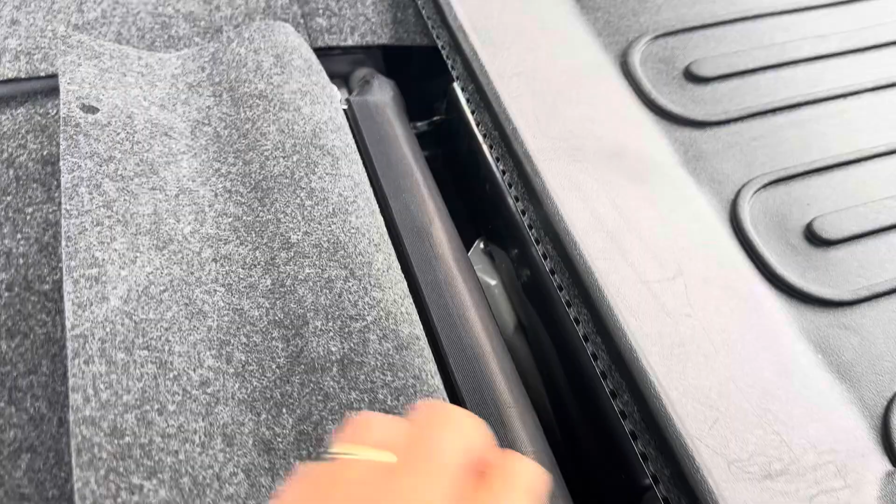I'll show you. Originally, I had planned on kind of mimicking the mounting points of the 04 to 07 STI, and I was going to try to get the bracket to kind of snake down through this little area here. However, the seat cushions kind of interfered with that, and I didn't want to muck around or modify the stock setup here, so I had to come up with something else.

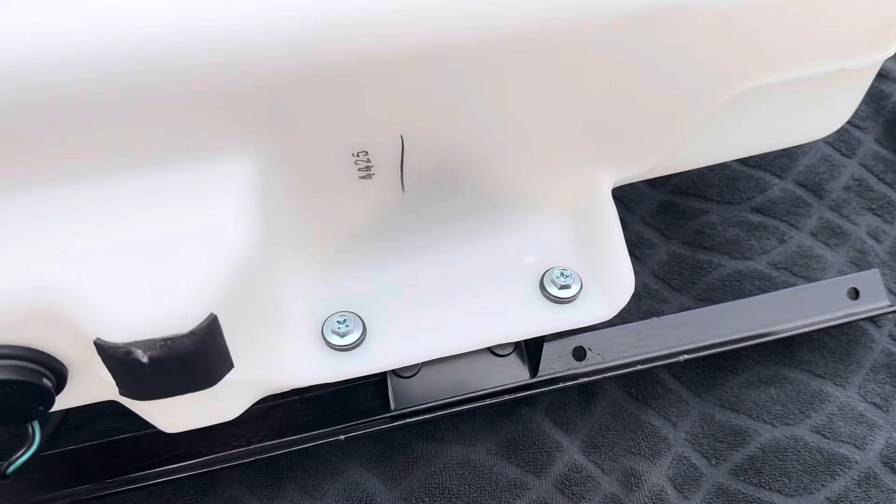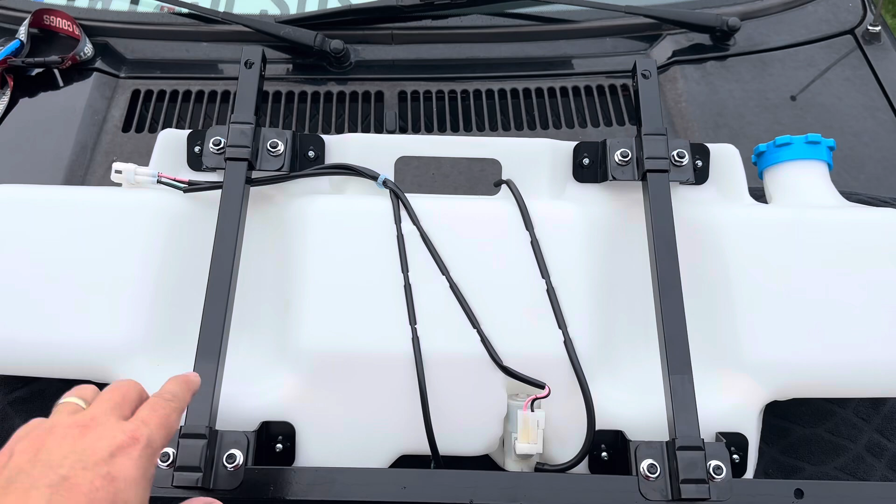So as you can see, this is the 12-liter intercooler spray reservoir. Now, I had to modify the bracket that came with this particular setup. Let me go ahead and flip this thing around and show you what I did. If you haven't seen the parts for this, you probably don't know what you're even looking at. But what came with this were these two, I don't know what you call them, mounts, square brackets or whatever. Anyways, this was on the bottom of this.

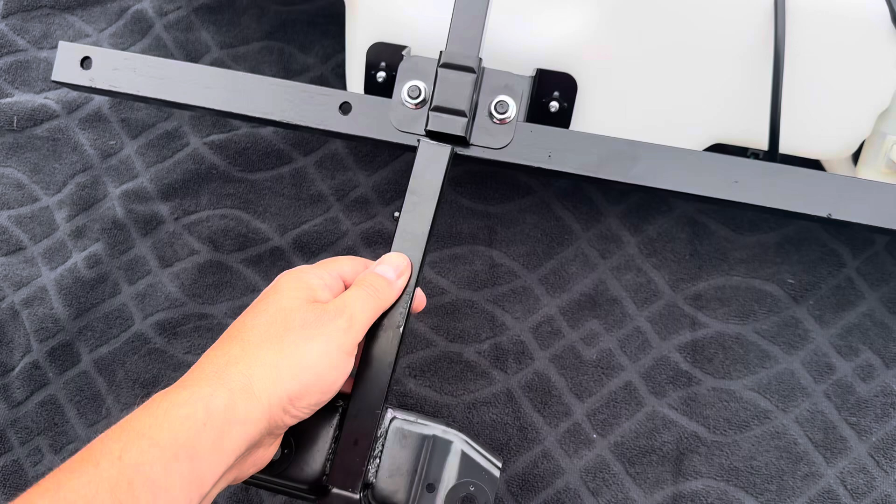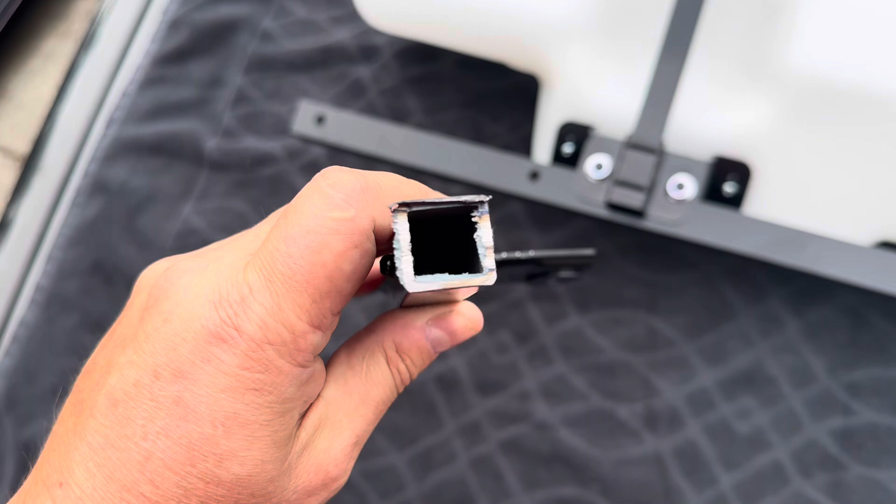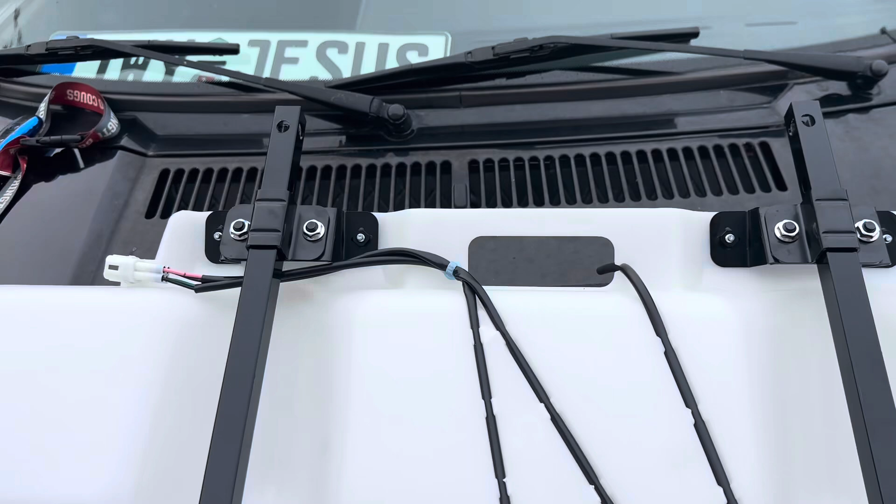I ended up having to cut this off because this is the part that goes down behind the seat, which did not work in my case. I thought about maybe bending it, but this steel is a bit too thick to be able to do that. So what I came up with is I just went down to my local Home Depot and got some of this angle iron here. The idea here is to pretty much just have two mounting points, which are going to be at the 12 o'clock position, as you can see here. So literally, here's going to be the back of the rear seat, and it's going to sit up like so.

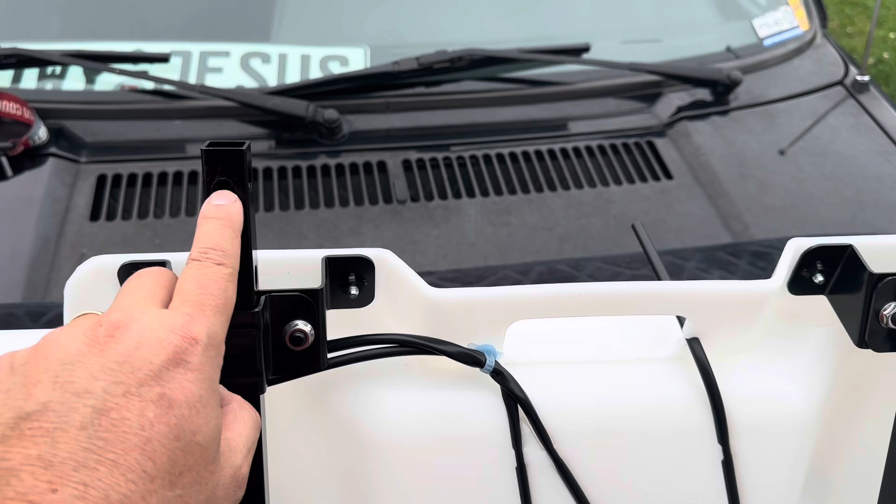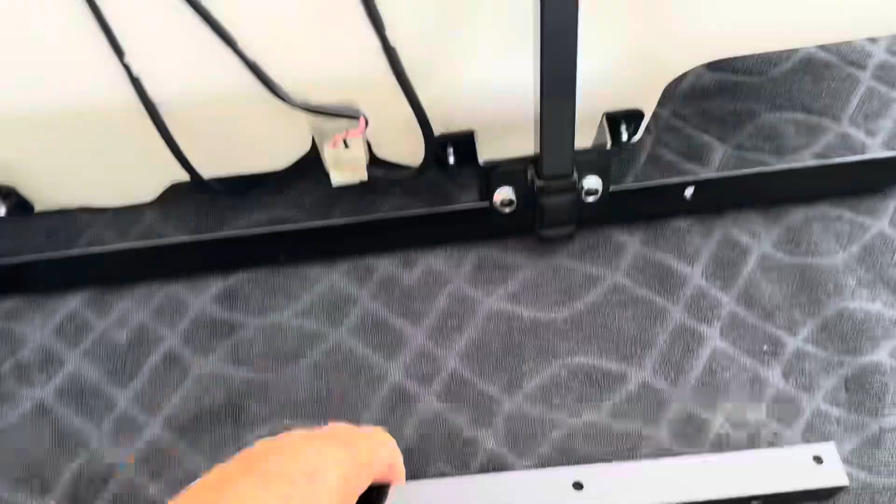Now, the only mounting points are going to be these two holes right here, which I have this little angle bracket that I'm going to use. What I'm going to do is self-tap this bracket into the rear shelf there where the subwoofer is. Let me show you. So it'll be mounted like so, and I plan on just running two bolts through there. Now, the way I have it set up, it's going to be like a gravity type mount. All the weight is going to be on this foot here, as you can see. I wanted to make it long enough so it was even with the reservoir on both sides. So that's why I went with the length that I did.

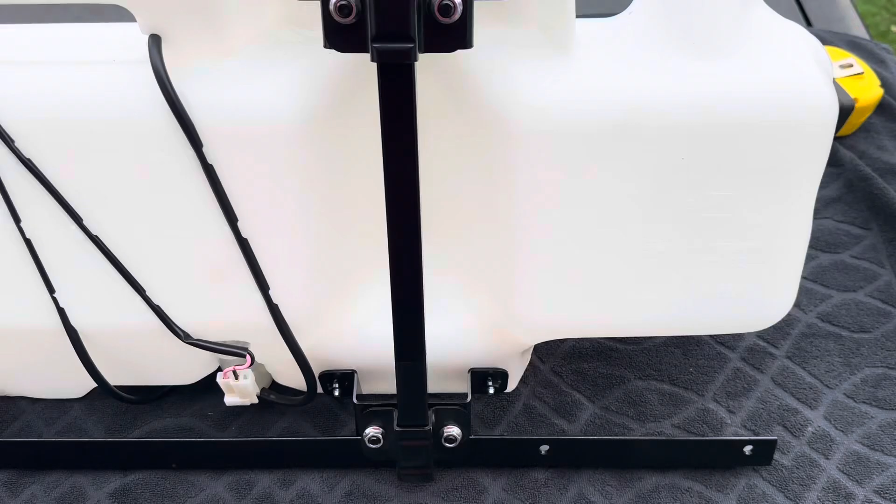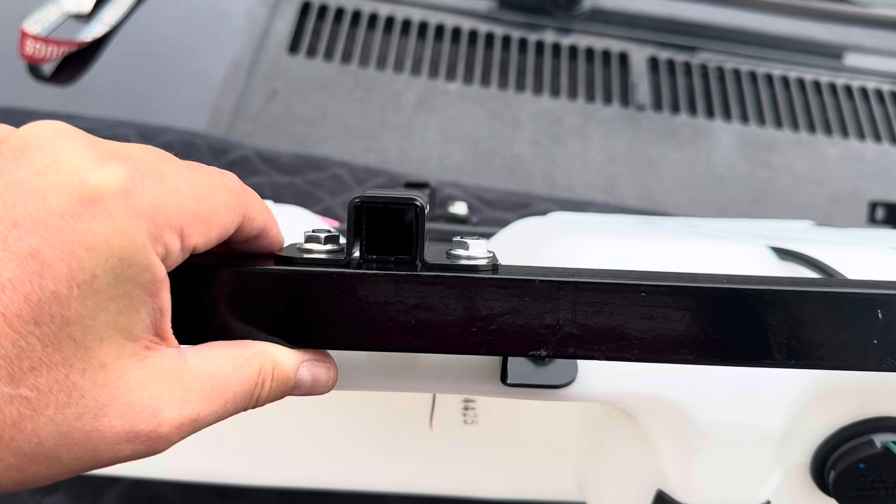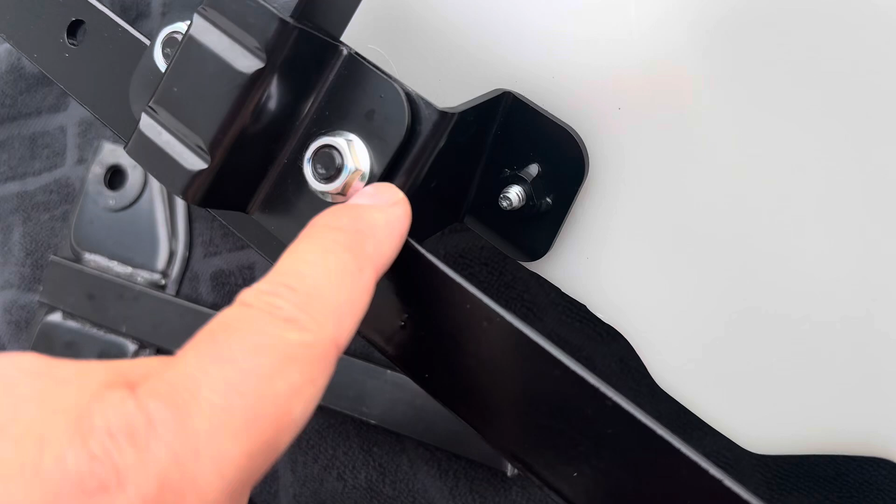Kind of jimmy rigged. I'm not sure if this is going to work. Everything's by trial and error. But this is what you have. So there's probably about 1/8 of an inch or 1/4 inch of this bracket that is resting right there on this mount. And the reason why I did that was I didn't want to put spacers in here, so I don't know. That's just kind of what I came up with. Now, it is long enough. There's probably going to be about 1/8 of an inch gap at the top of this from the rear shelf. So like I said, this is going to be trial and error. I'll see if this works.

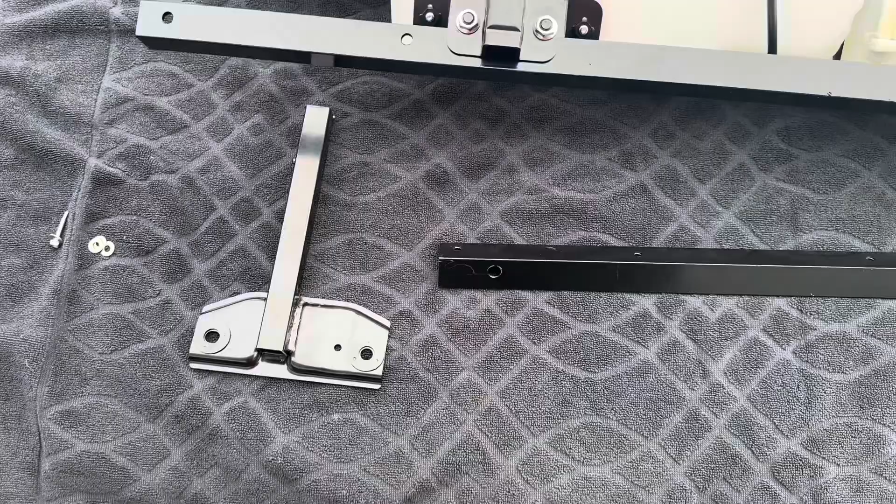And the part that I did take off, as I've shown you, is right here. I'm not going to give you any lengths because this is going to be kind of trial and error, so just do what works for you. I didn't want to modify my mat by cutting it up, so the idea here is it's going to be sitting on that angled part right there, and it's basically going to be kind of wedged in there, so I don't anticipate it moving around, if any, when it does get put in there. Besides, I'm probably gonna have my subwoofer kind of butted up against it inside the trunk there. So we'll see what happens next.

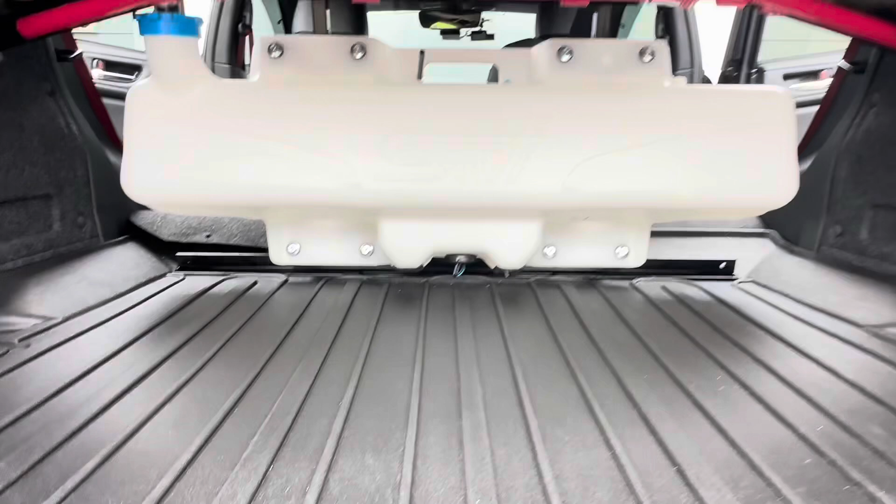All right, got the intercooler tank mounted. As you can see, it's mostly just gravity mounted. I'll show you. This is from the rear end, obviously.

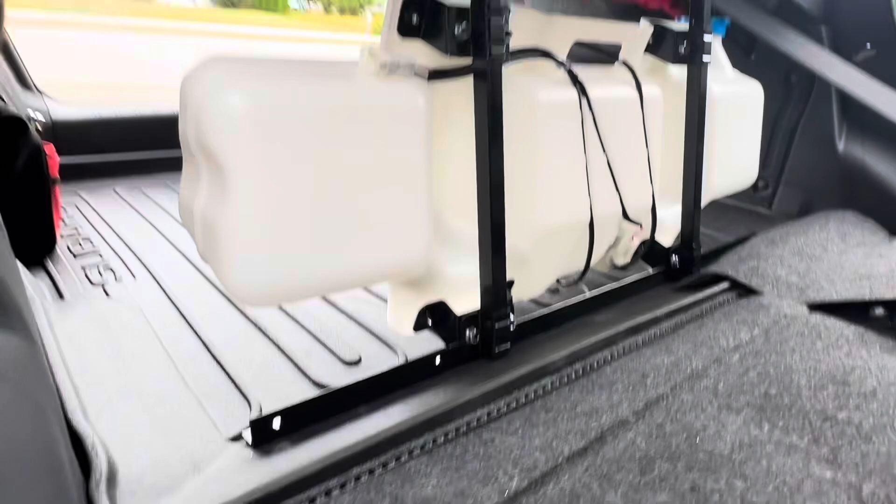So all the weight's going to be on these feet, and these bolts here are nothing more than just holding it to this bracket that I have self-tapped into the middle shelf here. But yeah, it's pretty sturdy. It's not going anywhere. All right, let's continue on.

Okay, so first order of business, we're going to attempt to install this hose. Like I said, this is from an 04 to an 07 STI. Here's the hose right before you. I'm not sure if we're actually going to need this 90-degree elbow here, but I will try to use this one that's already incorporated in the hose itself. And the location where I'm looking at putting that, well, let's just look at the picture here.

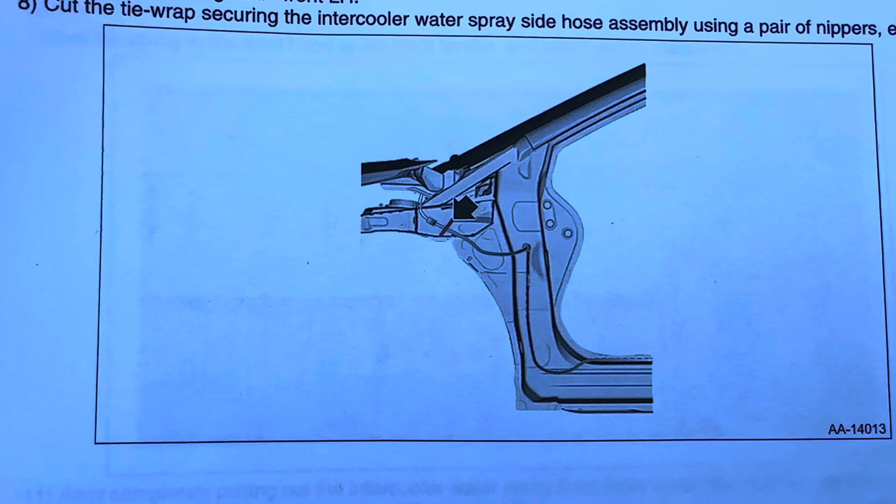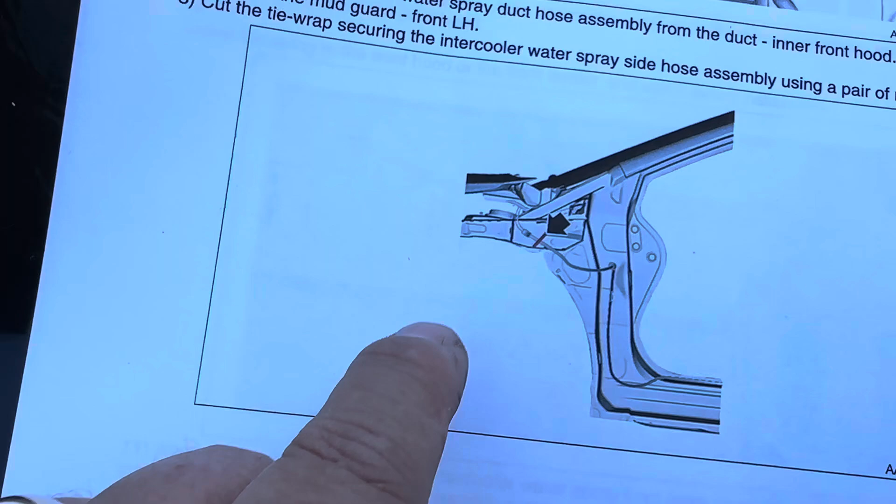So here's a diagram from the driver's side of the car. Obviously the door and the fender is removed, but as you can see there, the intercooler hose is right there. There's the hood. So it shows it coming out the bottom of the hood, I assume probably near where the hinge is. So if we look at the STI here, obviously the hood is up. There is a hole right there, which I'm hoping is where I can get this to feed through.

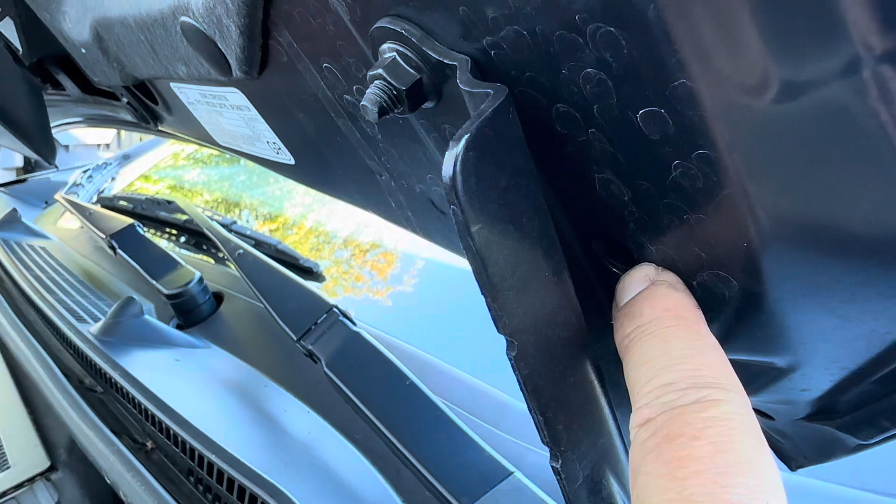So what I'm gonna go ahead and do is just take this hose sheeting and let's kind of snake it through to see if it pops up over in that location where we actually need it. And it sounds like it's moving through, and lo and behold, let's see. So feeding this through, I kind of shouldn't be using two hands for this operation, but be it as it may.

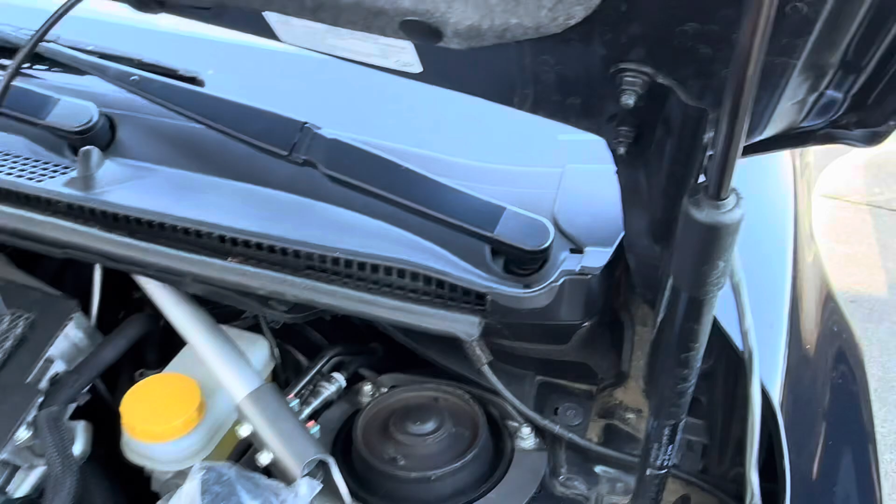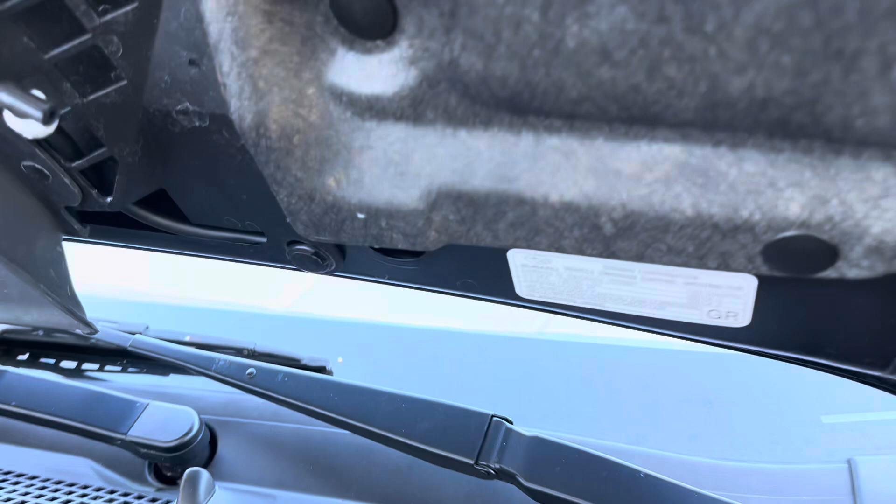So there we go. So what I'll simply do is take this end of the hose, tape it onto there, and simply feed it through. And I'm hoping this elbow right here will match up to where that hole is right there. All right, there you have it. So I can confirm that that part number will absolutely work with regards to the hood. So that 90-degree elbow, that joint is right there. So it's in an absolute perfect position as far as where this hose needs to be.

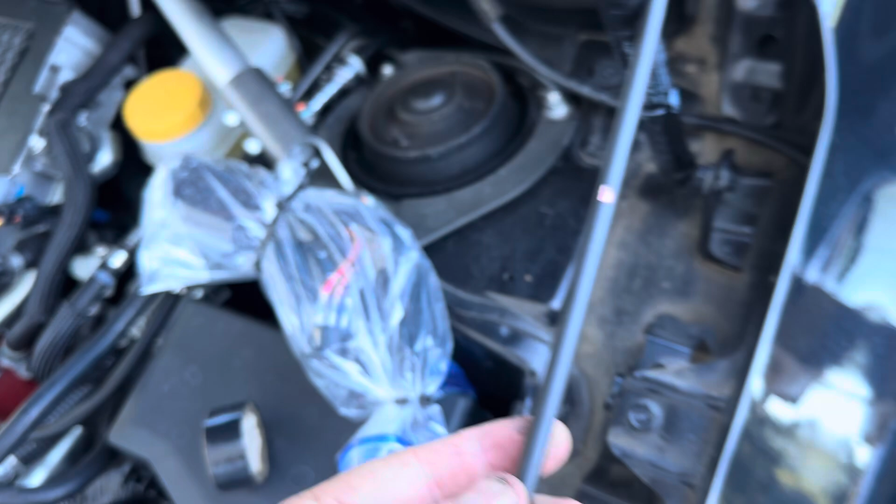And I just need to follow the instructions and bring it down through the little grommet that's on the inside of the fender, and I will go ahead and piece together the other intercooler hoses.

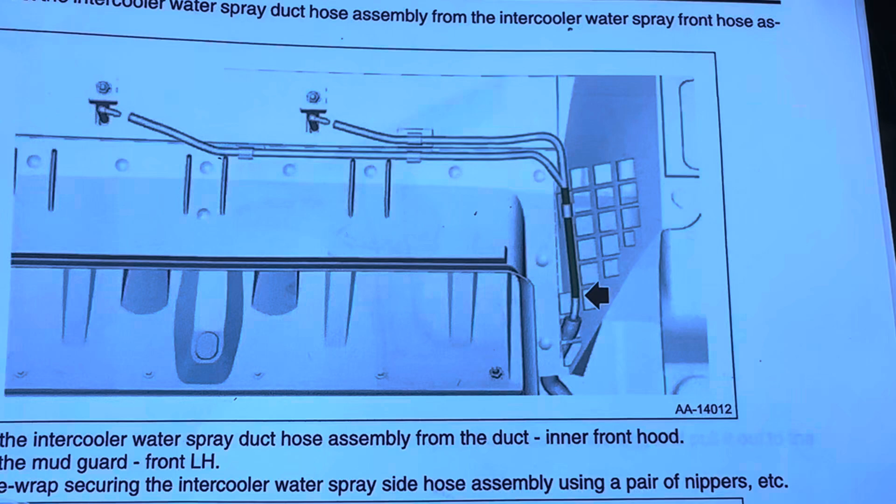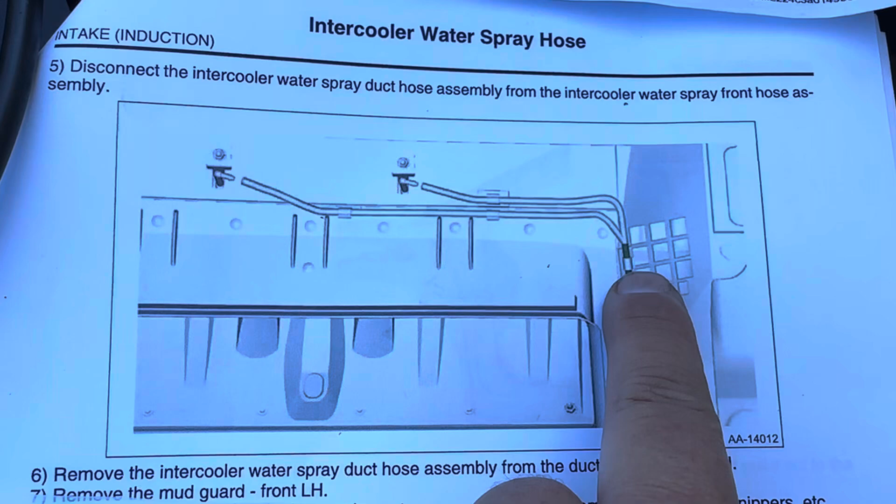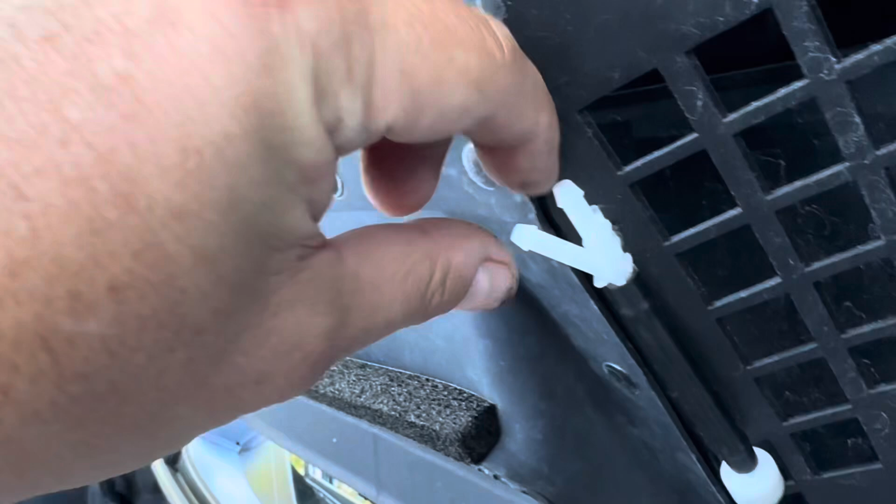Okay, next order of business is putting this part number, which is the splitter joint, if you will, which is represented right there. So just kind of lining it up with the way the S209 looks. I want to kind of get it in the exact same position. So I took a 1/4-inch drill, drilled a hole, and it simply just snaps into place.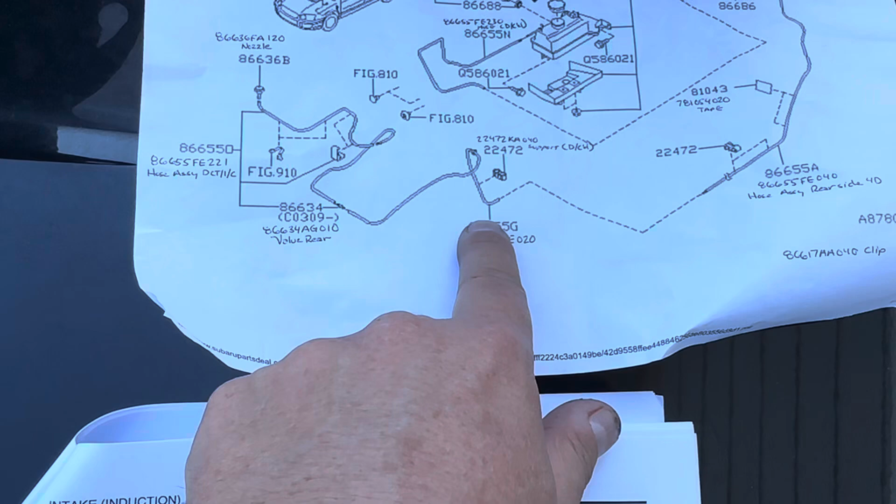And then I took 2.5 inches of this next part number, which is the next hose in line, which is right here. Again, going off the 2006 STI intercooler hose. So I figure if I have to, I could scab on an extra piece when it's in the trunk. I mean, I'm sure that this next piece will be long enough, so that's why I had no problems taking 2.5 inches off this particular hose here after the fender.

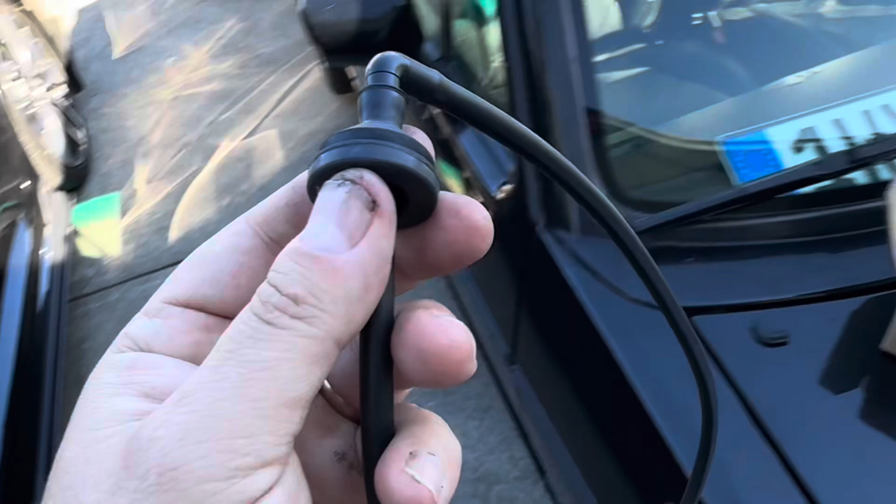So here's the hose here. So this is the fender grommet. So on the inside of the fender, this is how it's going to be. This shorter part going up to the hood, and then this longer part is where I took the 2.5 inches off of, hoping that won't be a big deal, but yeah. So there's our check valve, and I'll get the remaining hoses on next.

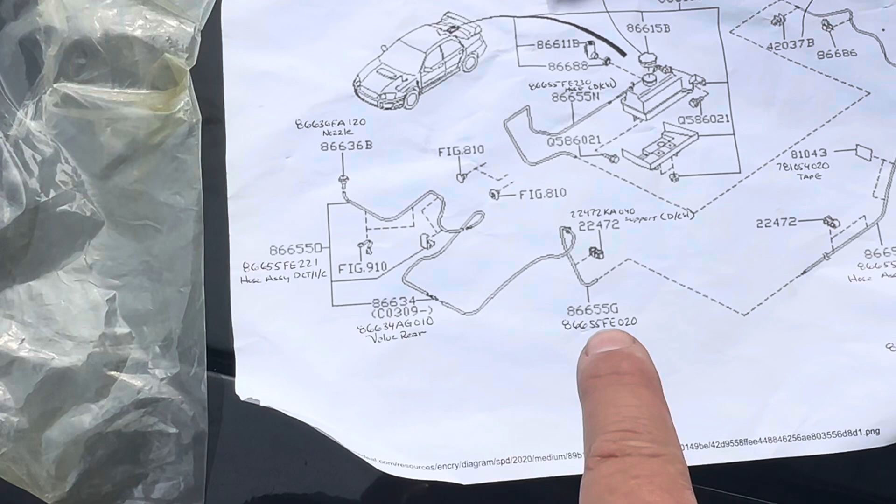Okay, so next I'm going to install this particular hose number, and looking at the diagram, it's this one. This one's already installed. This is what's in the hood, and this is what's going to go up to the nozzles. So this is the second one, and right here it shows there's a grommet, which I have right here, that passes through on either the firewall or the fender side of things. Well, since we really don't have a firewall grommet, we're going to feed it through the passenger side.

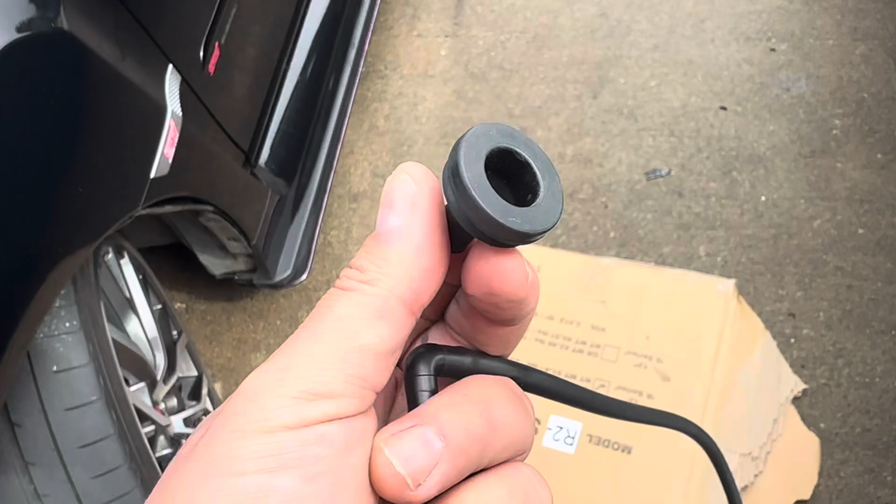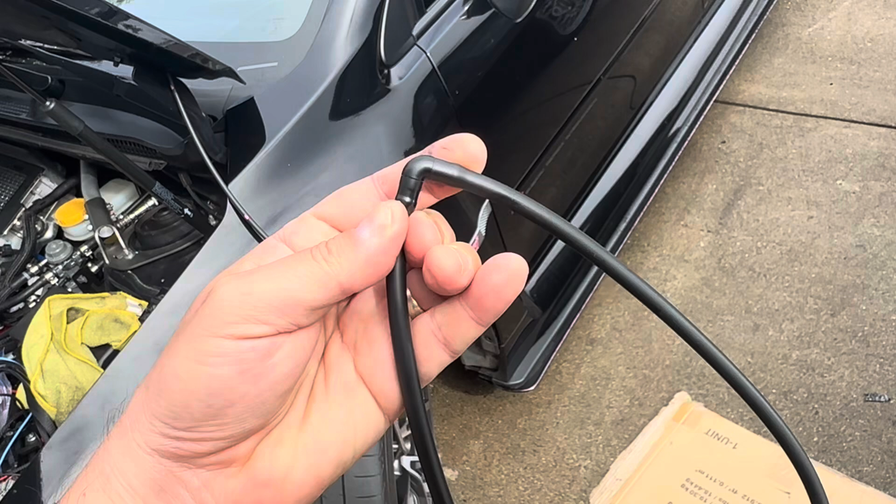So I got it all prepped up. We're going to connect it here. Don't really need this, as there's already a big boot grommet, if you will. So what I'm going to do is there's two lengths of this. There's the short side and long side. And what I'm going to do is strategically place this elbow here right into the grommet. And the reason being is I'm not sure how thick that grommet is, but I don't want it putting pressure where it's going to squeeze the hose off.

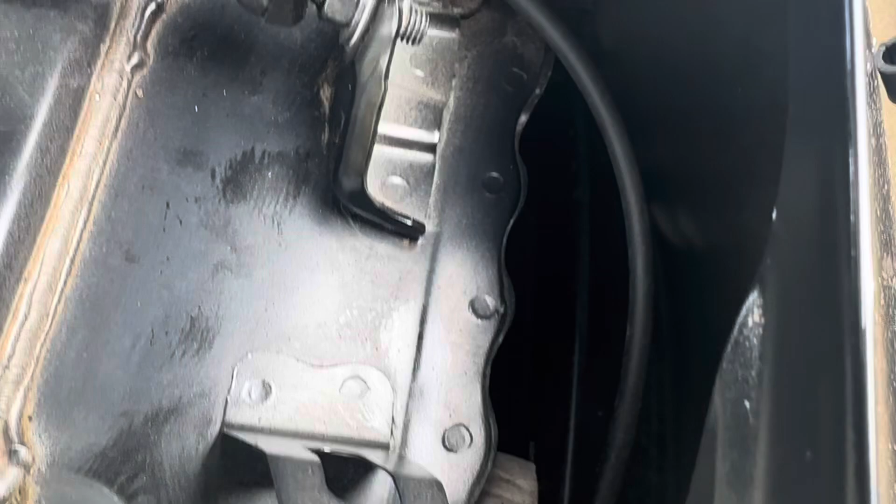So if I strategically place this elbow in there, which is hard plastic on the inside, that should prevent it from clamping down on it. So yeah, we'll just connect it there, feed it down through. You can't really see much down there, but there are a couple little brackets that you can feed it through so it doesn't flip-flop around in there. So we'll get that installed.

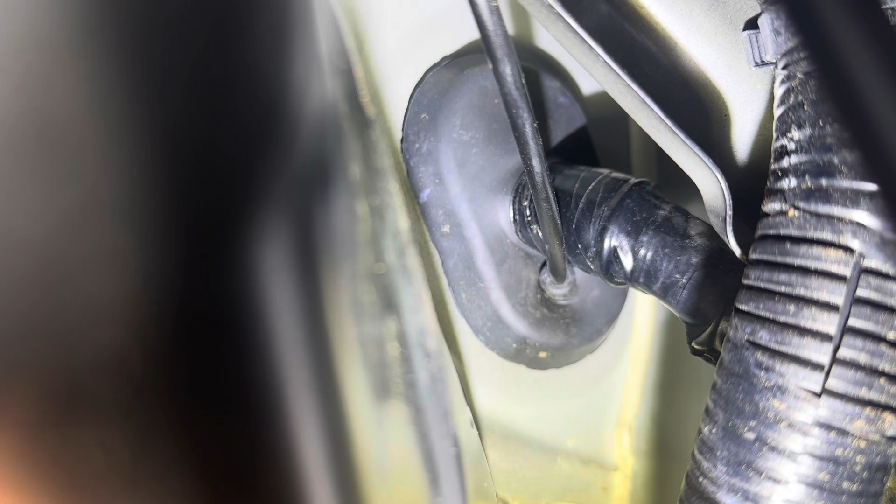All right, for those of you that do not know what grommet I'm talking about, here I have the driver's side fender liner peeled back. Got a flashlight there, and that's where we're gonna go. Sorry, it's not focusing here. I'm gonna try to punch through right where the hood release cable goes through, because I need to utilize the space up on top to pass my amplifier feed wire through. I don't want to have too much going on at the same area, so I kind of want to separate them.

So I'm gonna just punch it in through, like I said, the smaller of the two going through the grommet there, and all I'm going to do is put an X into that grommet using this little utility knife here and pass it through. And like I said, I'm going to put the elbow through, and once I get everything all dry fitted, I'll go ahead and put some RTV on there so it doesn't move around.

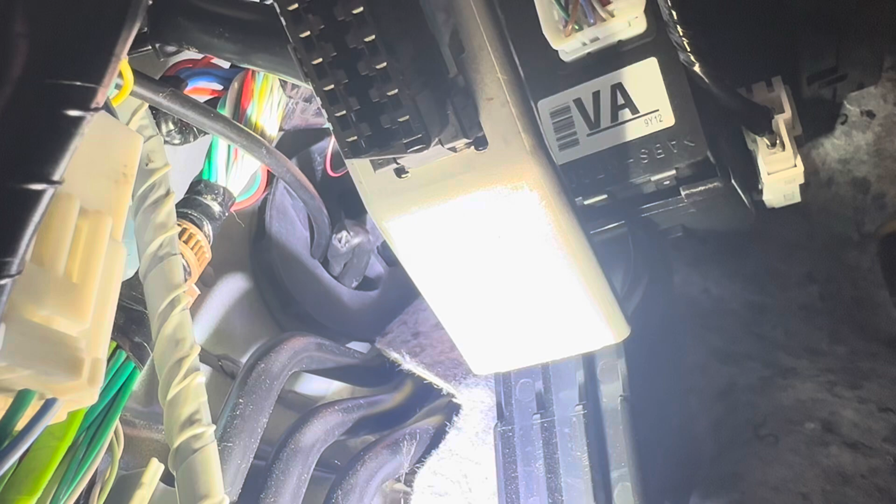All right, so here's a little trick to get it through the grommet. Obviously this plastic on this hose is way softer than the rubber on that grommet, and plus it's thicker. So this way, just put your hose like this and just push it up into the hole. And once you do that, just come over on the other side and you can see the screwdriver right there with the hose on the end of it. So just grab a hold of it and feed it through. Obviously not with the screwdriver, but just pull the hose through.

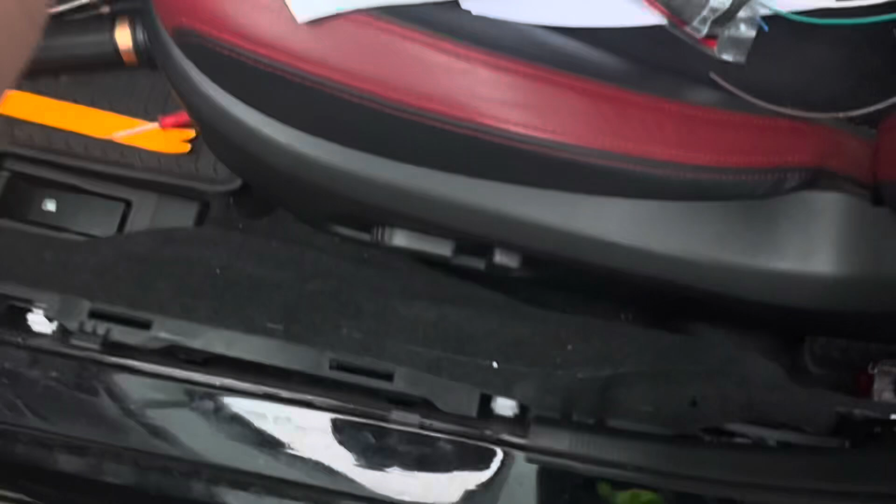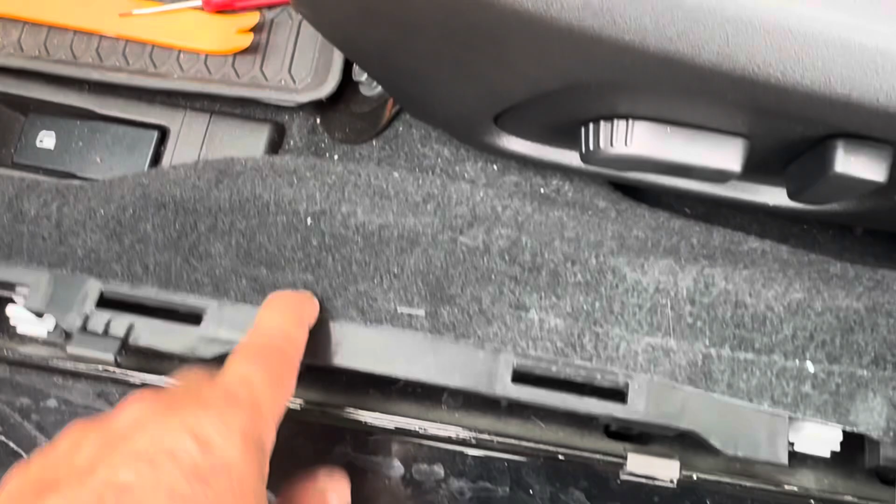Okay, now we got the third and final hose connected. And it's that clear hose right there. And when you do put this down, pay particular close attention to make sure you're not putting your hose in a pinch point. Underneath this is really solid. I mean, this is all plastic, so it's going to help to protect that hose.

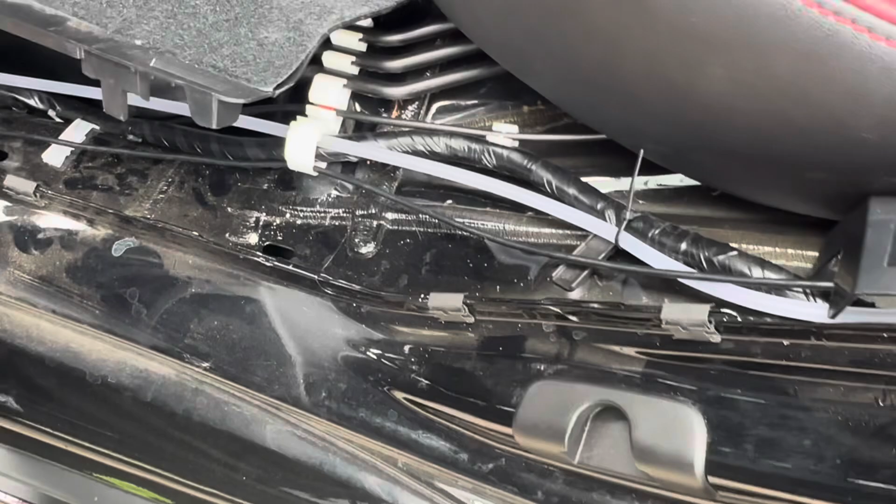Coming back here to the back, and that is the prescribed location in the S209 as far as where you run your hose. Now, since I have a different configuration, mine goes right here, and this is a bunch of slack. I'm not sure if I'm going to cut the hose or if I'm just going to put the spare behind this trim piece. All right, now let's move on to the wiring harness.

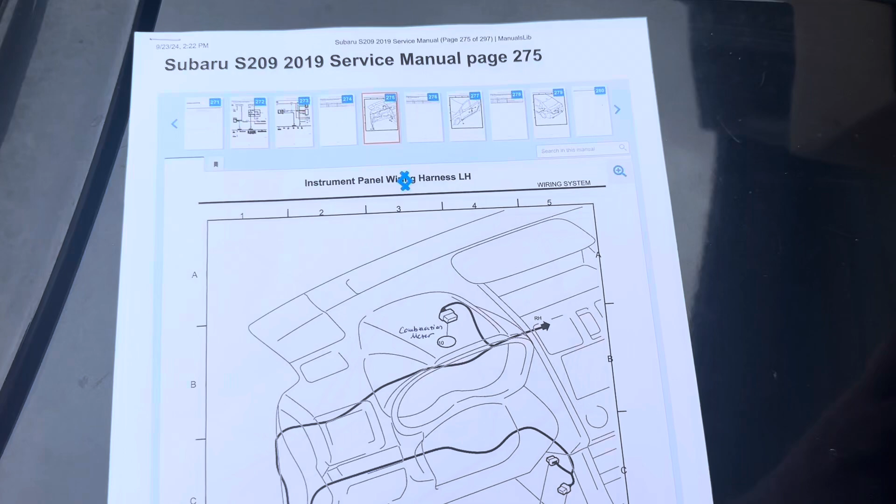Okay, so we have the wiring harness here. As I mentioned before, this is the same one that's out of the S209. For some reason or another, I was able to secure this particular part without having the S209, so I'm pretty happy about that. Now, it does not come with any instructions. However, as I previously have mentioned, you can actually print off pages off of the S209.

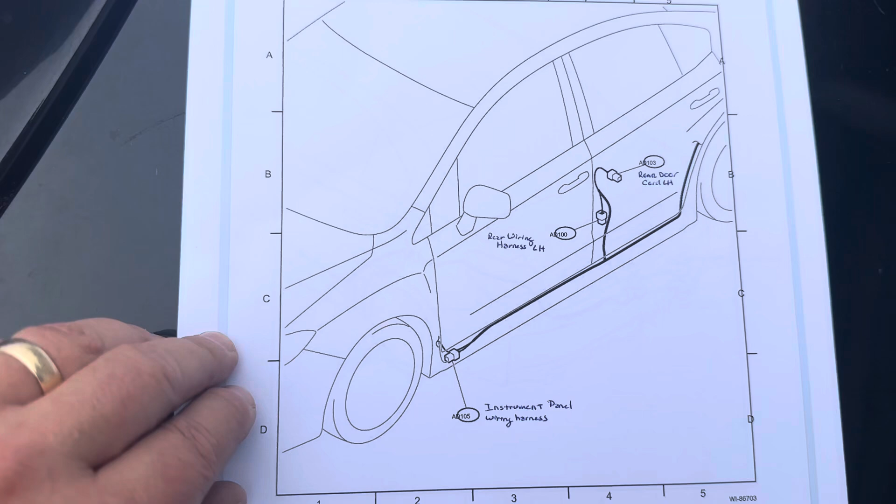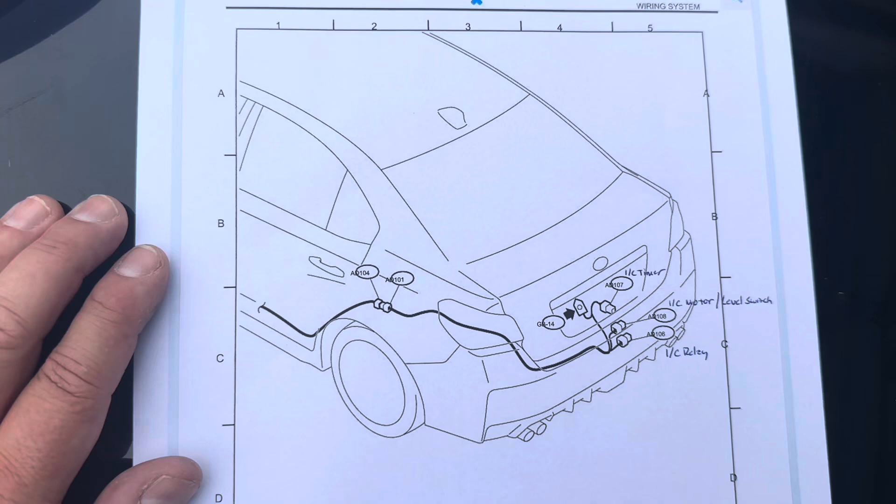I just simply typed in S209 shop manual, and you just look at the table of contents, and here you go. So everything here in the black, I believe, is what you're going to need in order to get this put together. Now, looking at this, there are certain parts that I can see on the wiring harness that's going to help me to put this together, but anymore it's just going to be a crapshoot, just trying to figure things out. So at least I know the rear from the front.

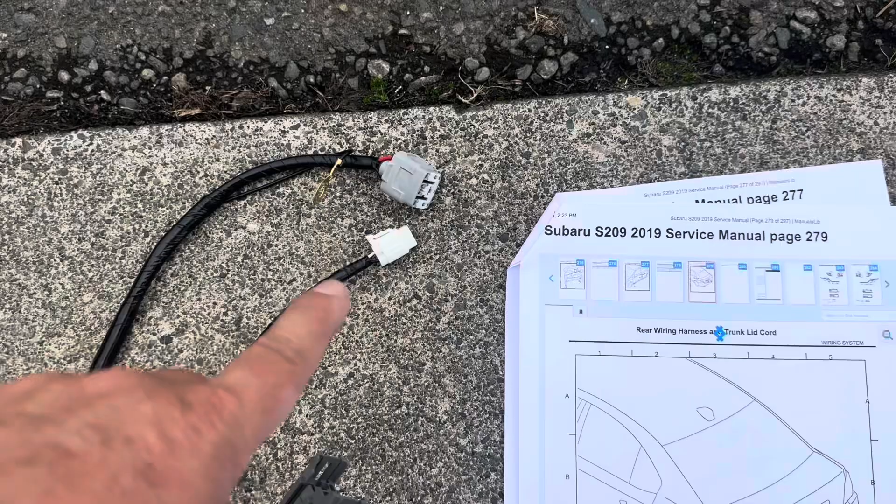So in the trunk of the car, there you have it. So there's provisions for the actual pump itself, provisions for a relay, and then a timer, and I'll have to figure out which one it is.

So just following it here. Actually, I can grab the instructions here. So we have that all set up. Then here's a junction. I don't know if I'm going to take that apart or not. Probably, just because how bulky those are. Depends on if I can get that through the back seat.

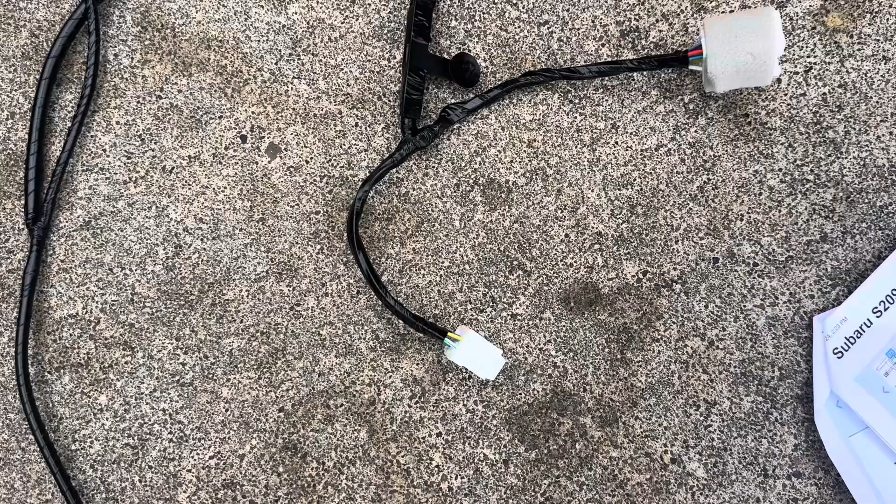And then here we come to... It looks like these are the same plug, just a male and female. So I assume we piggyback into an existing plug that's already in the car. And I can see right here in the pillar, that's where we're going to be at.

And then, my understanding, this is the level alarm for the intercooler reservoir to let you know if you're getting too low. I'm just going to kind of leave that aside. I might get a status light for that.

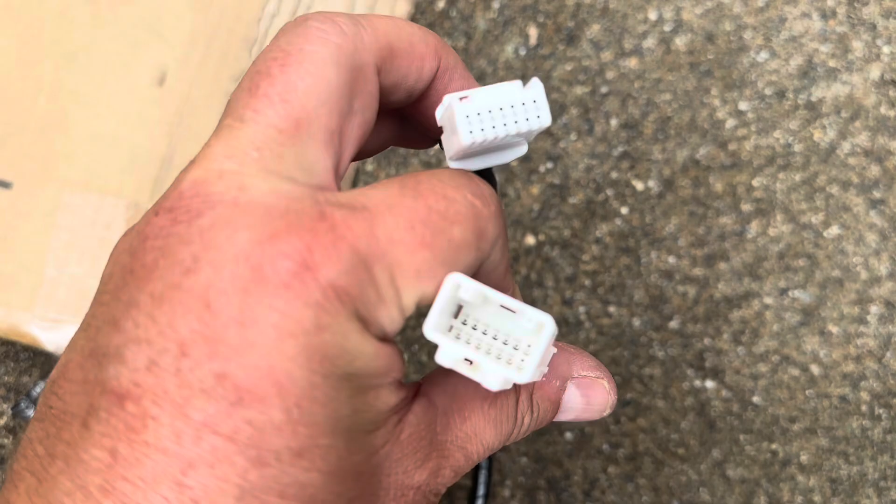And then my understanding, that goes up to the steering wheel, and again, same plug. I got a male and female, so once again, looks like we piggyback onto an existing setup. So without further ado, let's get this figured out.

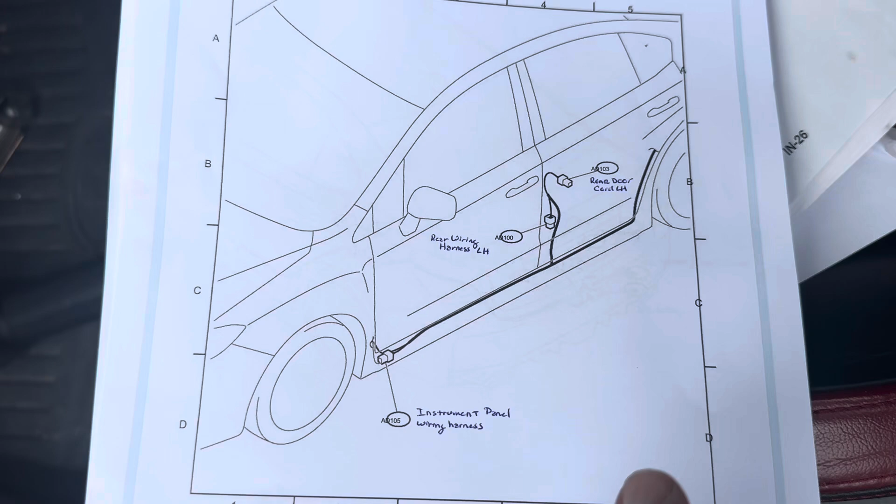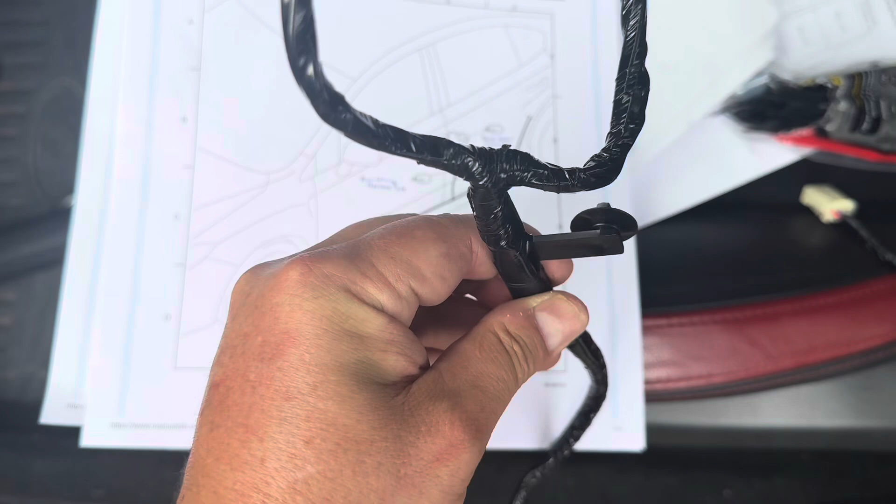Okay, so first order of business, we're going to tackle this portion right here. Here are the connectors, and looking at the layout of this connector, it looks like it goes like so. And the reason why I say that is that, I don't know what you call that, the connector part right there. I happen to see one right here.

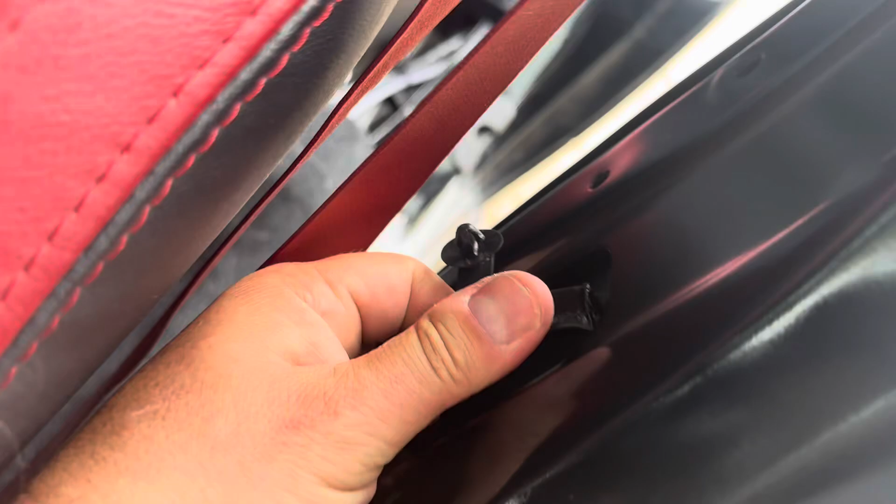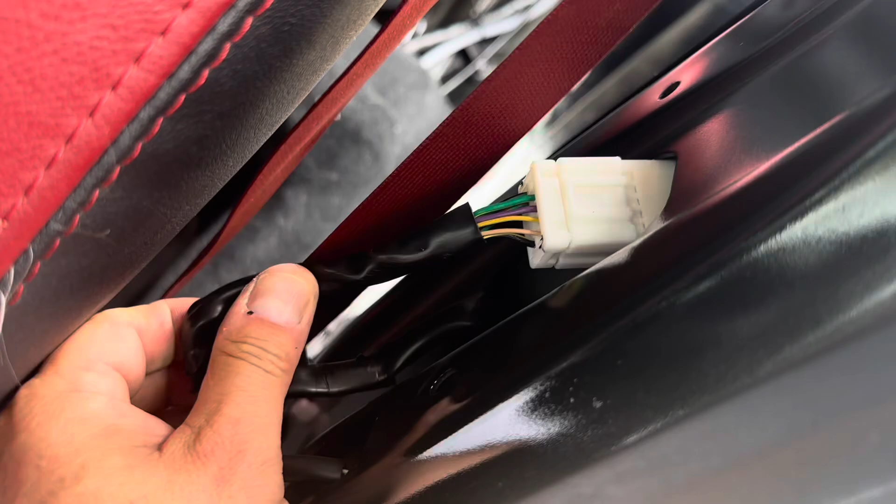So let's go ahead and disconnect this and see what we have in here. Aha! So that, oh, that's as far as it's going to go. So that's the wire connector. So let me just back up so you have a reference here.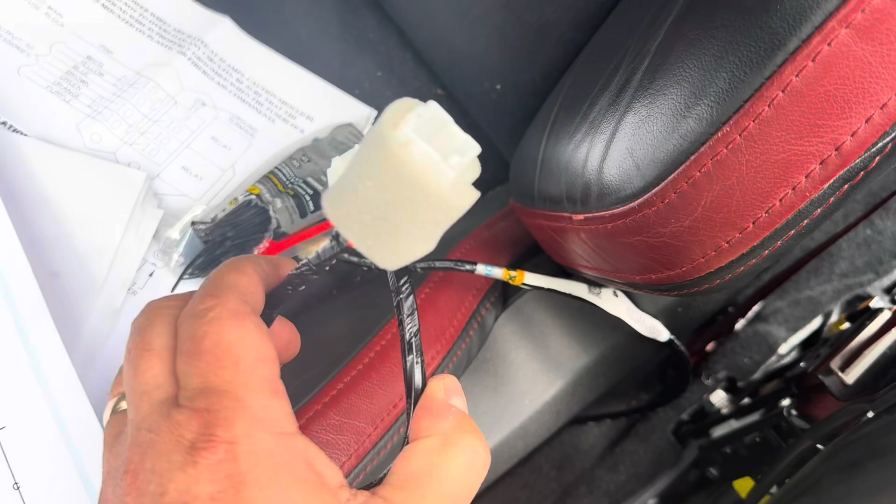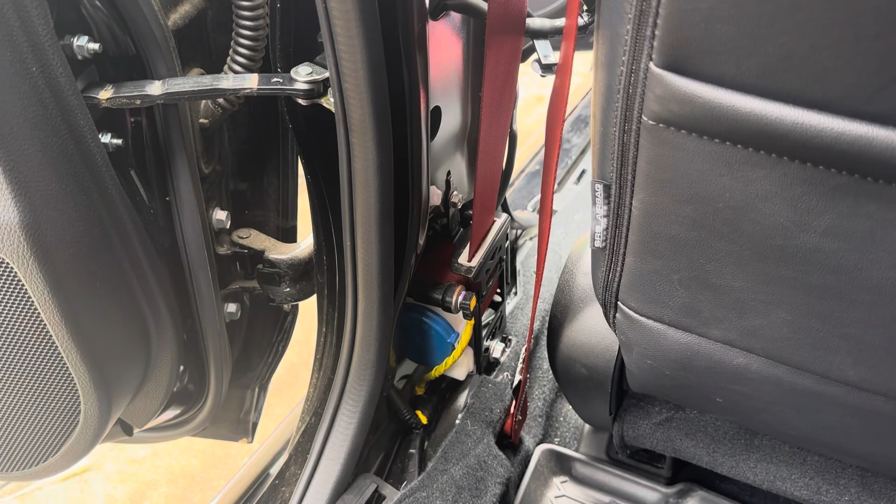Here's the driver's seat. All right, so what we're going to do is take this apart, take this, run it up through this pillar right here, and come out right here and make the connections. All right, it's inevitable. Somebody's going to ask me, well, how did you route the wires? So I'm just going to show you.

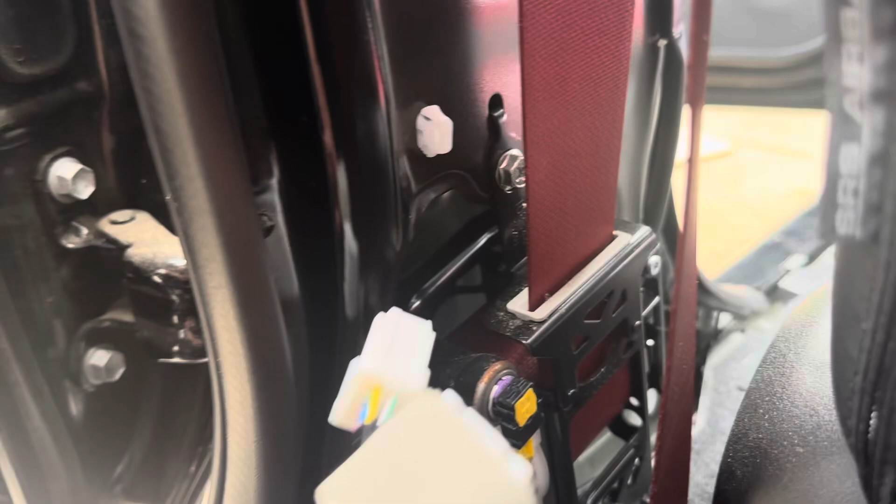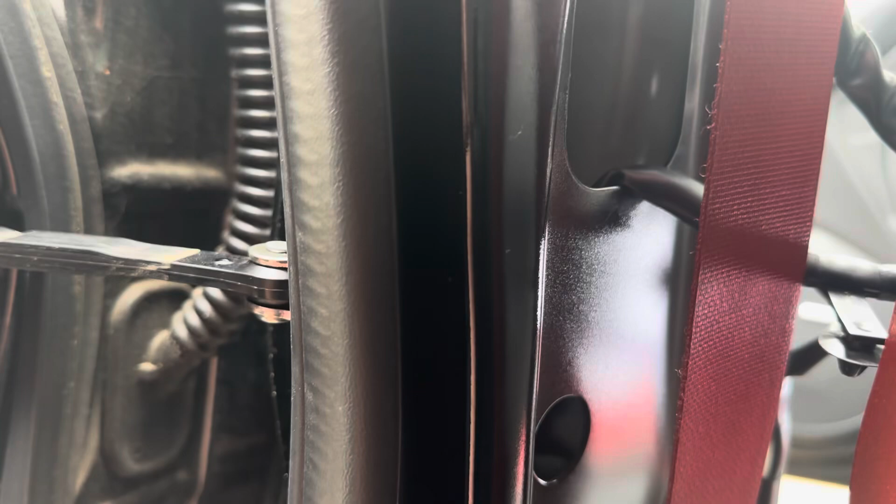So I take the plugs from the S209 intercooler sprayer harness, and right where the seat belt is there, kind of see where the wire goes up. I'm just going to take my wiring harness and just feed it upward. There it is right there. It's trying to make its way up. There's just so much. There we go.

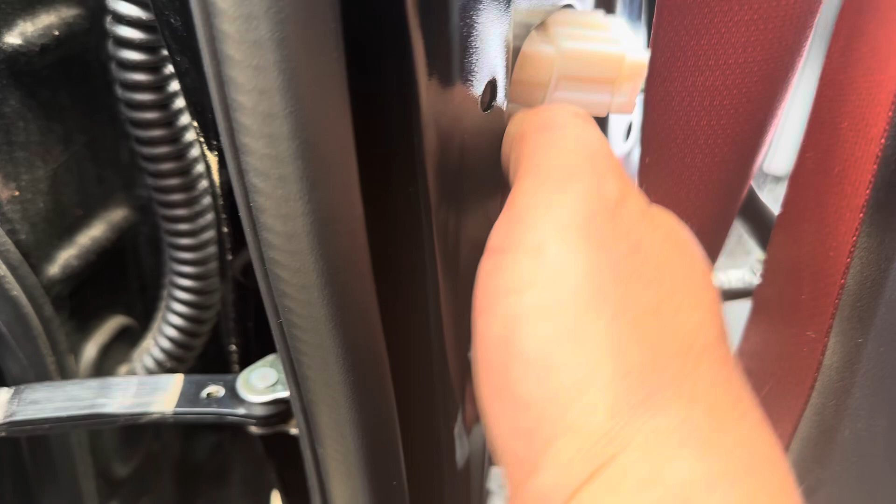Sorry guys, one-man operation here. All right, so there are my plugs. I'm gonna plug this guy and mate those up there, and I'll be back.

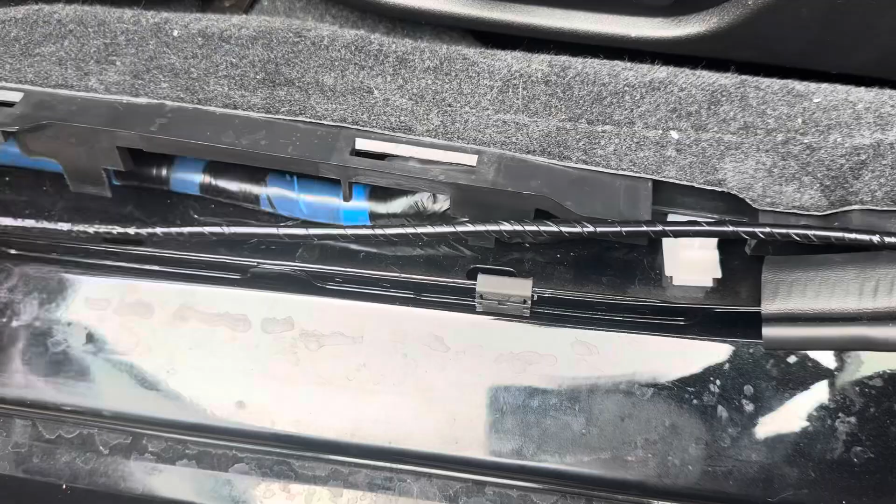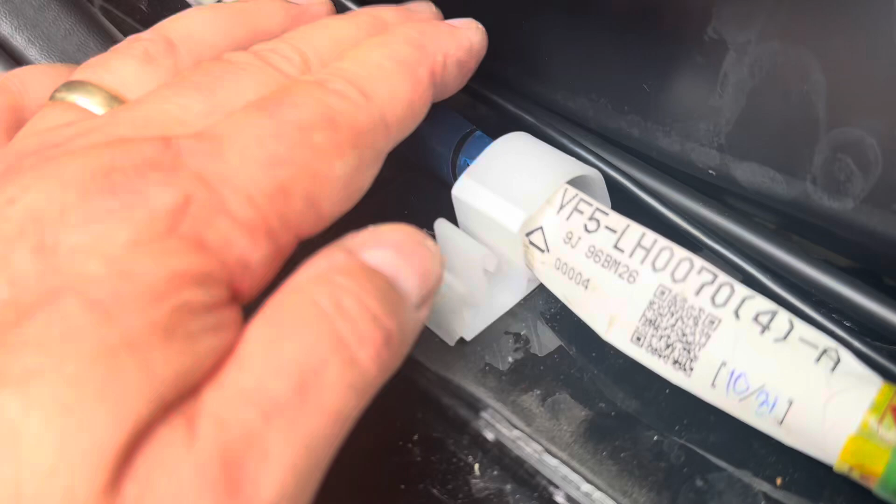Okay, so once you get your wiring harness all hooked up, then go ahead and start putting your wiring harness into these white little clamps. Now these things are a pain in the butt unless you know how to work them, because they're a double capture. So it captures on the bottom and it captures on the top.

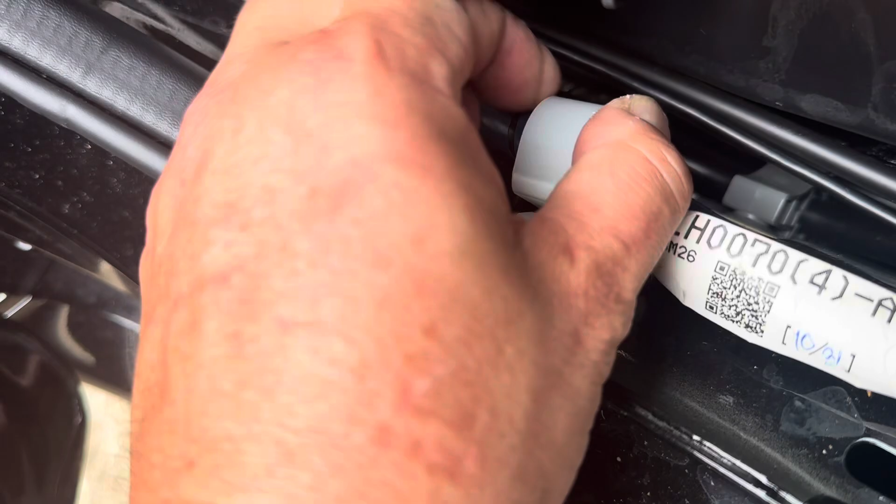So just to save you a headache, you just basically take it and just slide it to the side. That's all you do. Instead of trying to fight it, it's not gonna work. So you just slide it.

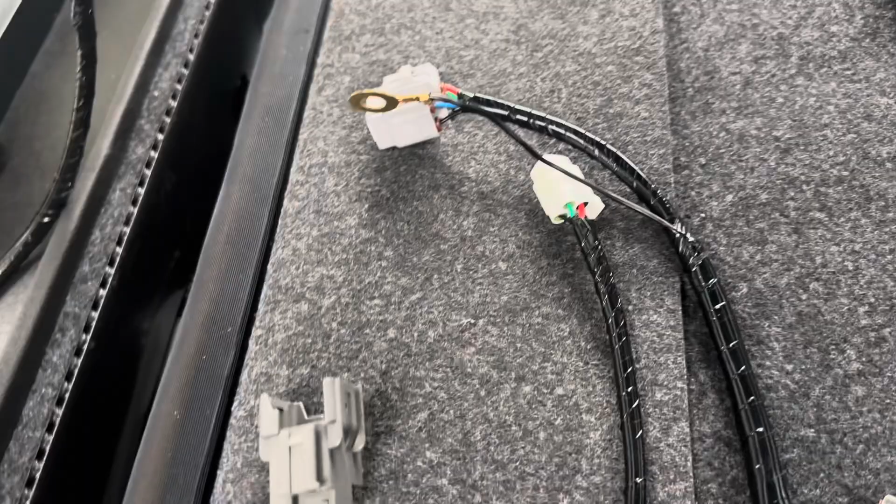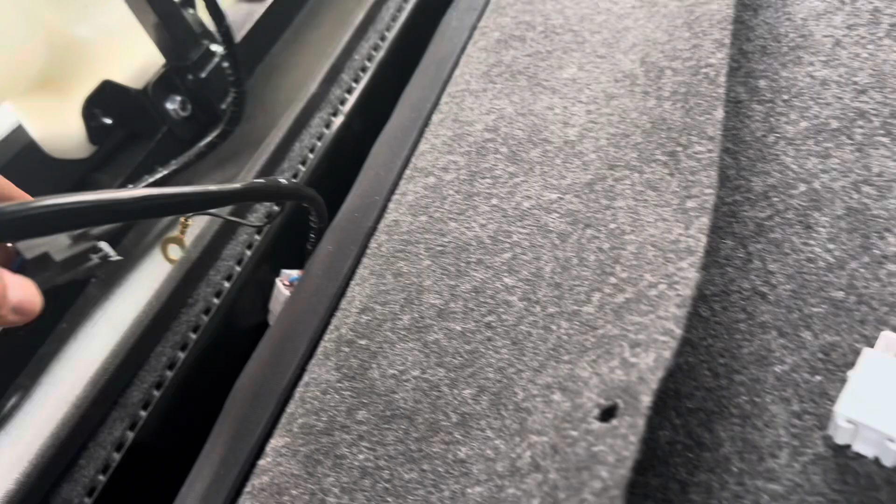Okay, so I got my intercooler spray harness kind of tucked back, preliminary where I want it. Now I just need to make the connections of the 3 ends here. So just kind of matching things up. This is obviously the pump side of things. This guy goes into here, and then I'm going to use this ground connection.

What I did was I removed one of the, I don't know if you call them, like baby seat harness bolts, which is right here. So I'm going to plug that into there for my ground, along with my amp wire.

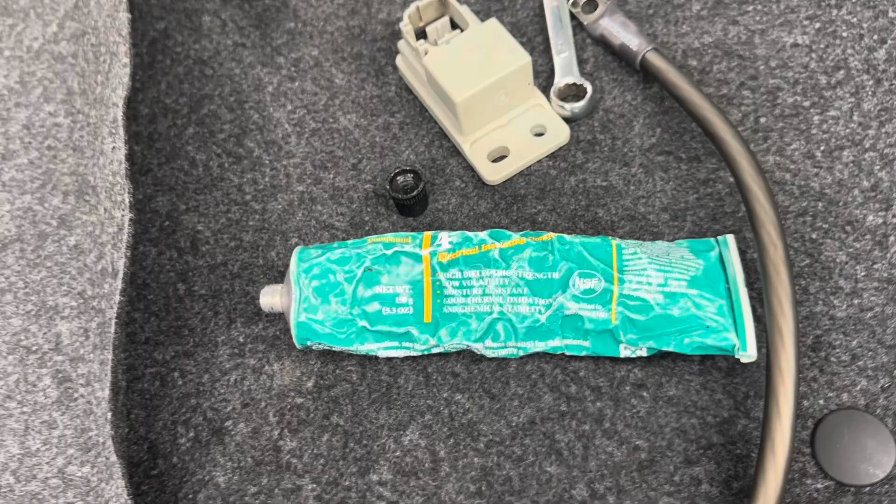Now this is not going to be the final product. I need to get some wire management and things tucked away, but I just want to get it hooked up for now, just to make sure everything's good to go. Also, a side note, anytime you make a connection, it's a good idea to use some dielectric grease, and this is what I typically use for all my connections.